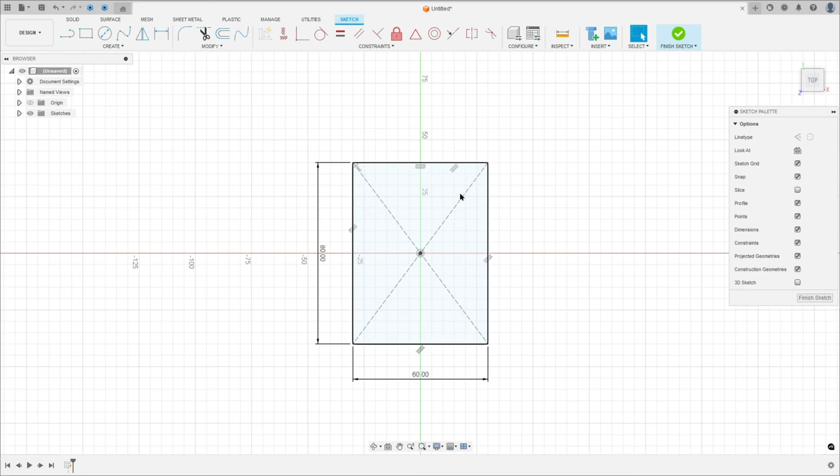So open Fusion, go to create a sketch, select the top plane, select the center rectangle, click here on the midpoint, 80 by 60 millimeters, okay? Finish the sketch, go to extrude, extrude this minus 25 millimeters and the taper angle 20 degrees. Press OK. We made this. Okay.

Now we'll make this cylinder here. We have 50 millimeters of radius, the hole has 40 millimeters of radius, and we need to extrude this 40 millimeters, okay? And the distance between the center of the circle and this face here is 155 millimeters.

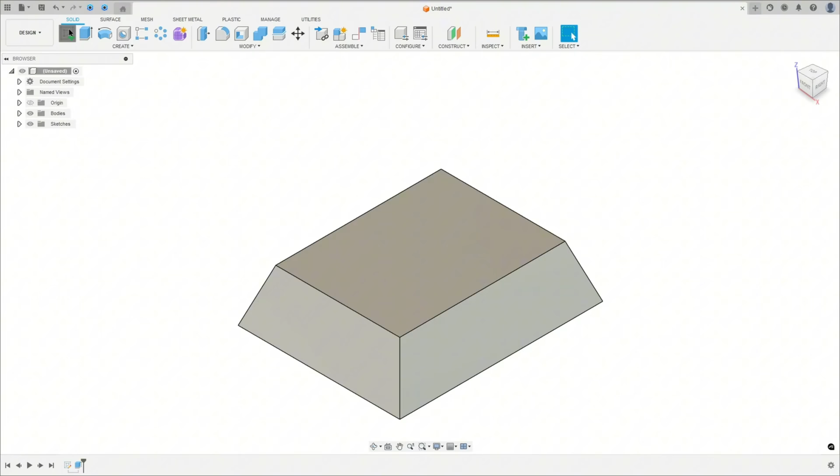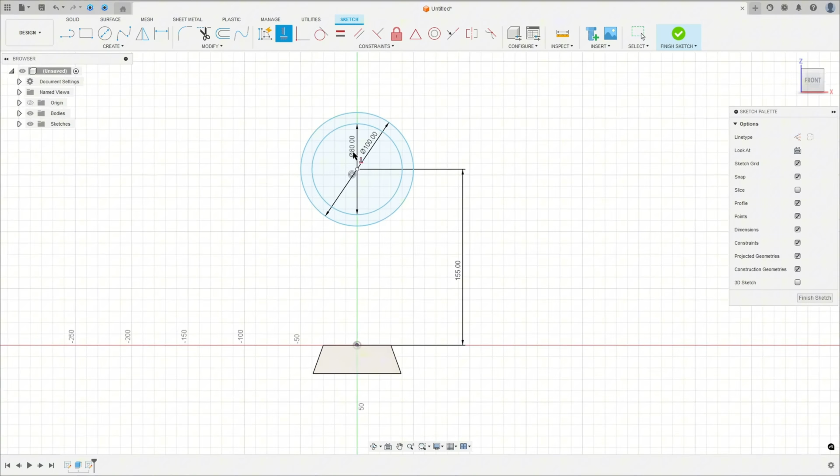So go to create a sketch, select the front plane, select a circle, make a circle here with 100 millimeters and another one with 80 millimeters. Go to sketch dimension, the distance between the circle and the midpoint here, 155 millimeters. And go to constraint, select horizontal/vertical, select this point and this point here.

Now finish the sketch, go to extrude, select this profile. The direction here, select symmetric, measurement whole length, and the distance here, 40 millimeters, okay? We made this.

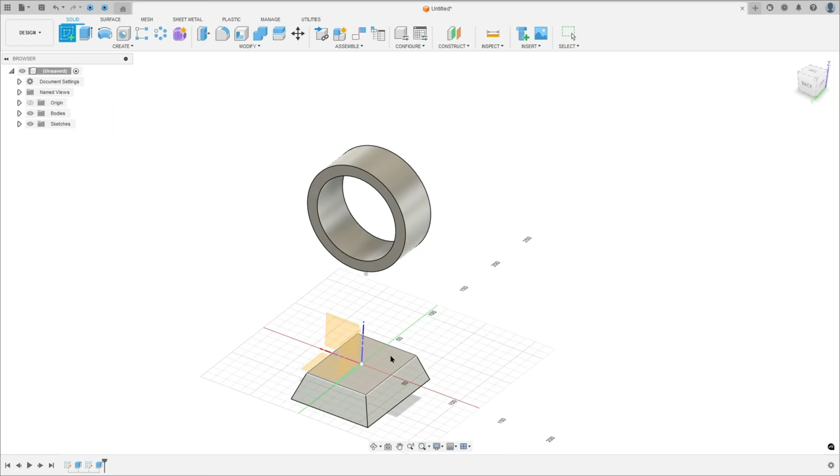Now we make the cylinder here, from this face to this cylinder here. The diameter is 30 millimeters. So go to create a sketch, select this face, select the circle, make a circle here with 30 millimeters at the midpoint, finish the sketch, go to extrude, select this profile, the extent here to object, select this object here, operation join and press OK. Made this, okay.

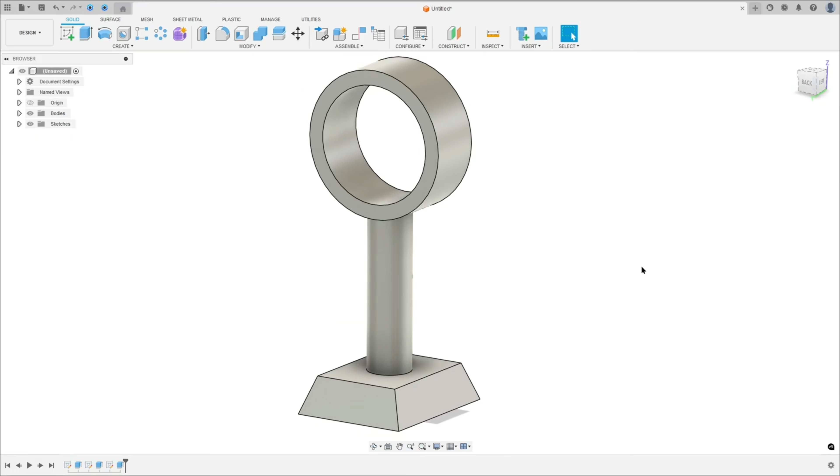Now we'll make this cut here. This cut has a radius here of 12.5 millimeters and we have a line here. It is like a rectangle with a circle in the center, okay? 18 millimeters here and 12.5 millimeters of radius.

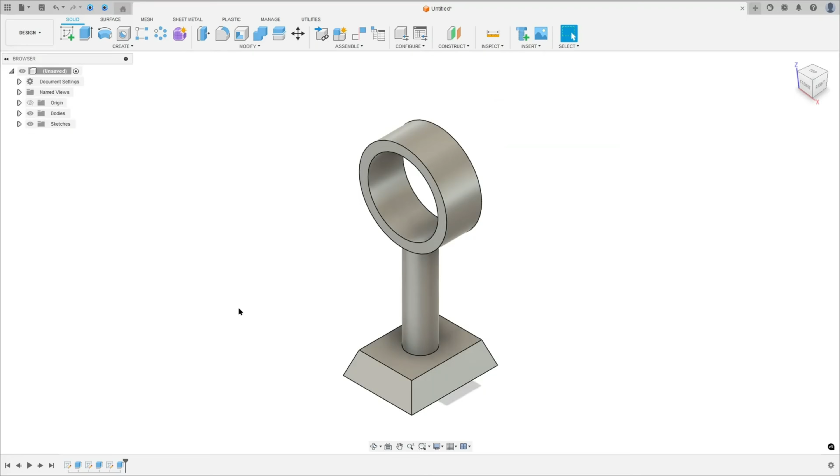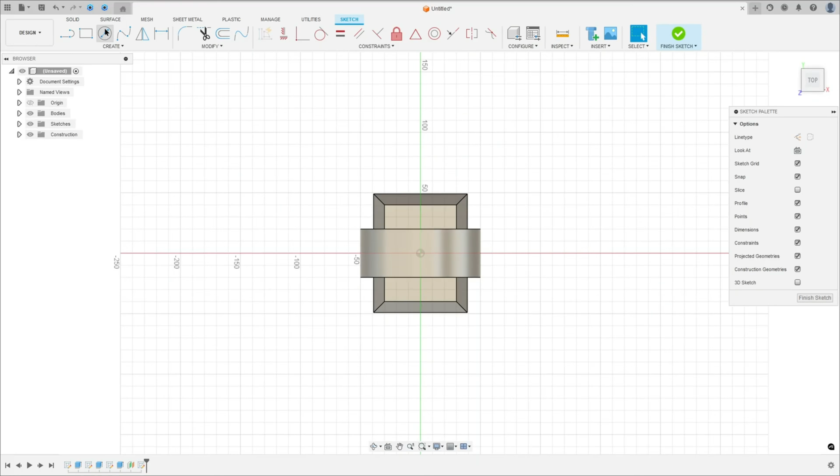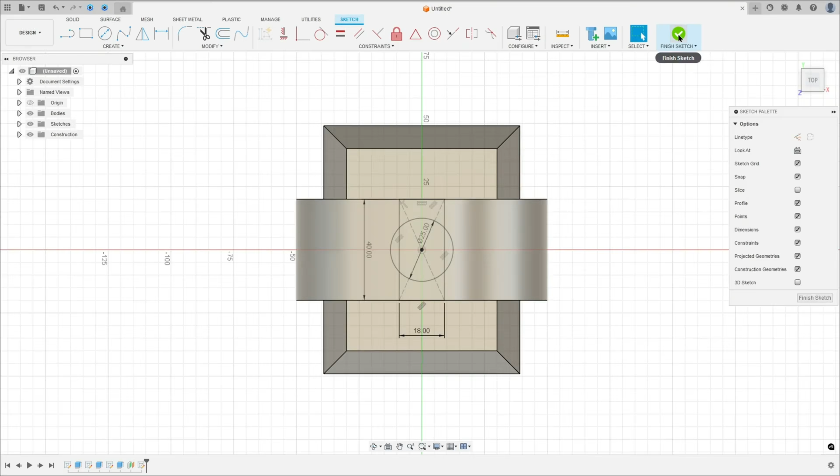So first, go to construct, select offset plane, select this face here. The offset here is 155, and go to create a sketch, select this plane here. Select a circle, click here on the midpoint, make a circle with 25 millimeters. And go to center rectangle, click here on the midpoint. The distance here, 40 millimeters by 18 millimeters, okay? And finish the sketch. We have this profile here.

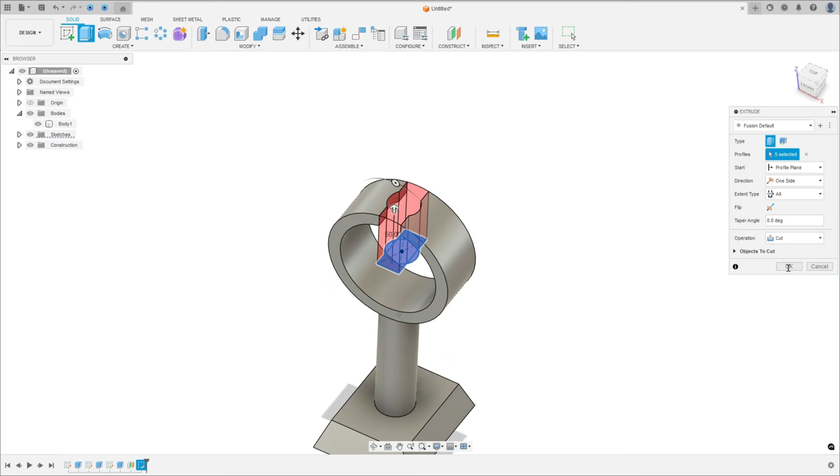Now go to extrude, select this profile, all this face here. And the direction, one side, the extent type, all, operation cut, and press OK. We made this cut here.

Now we need to create a cut here. The diameter here is 30 millimeters. And the distance from this point here to this edge is 42 millimeters, okay?

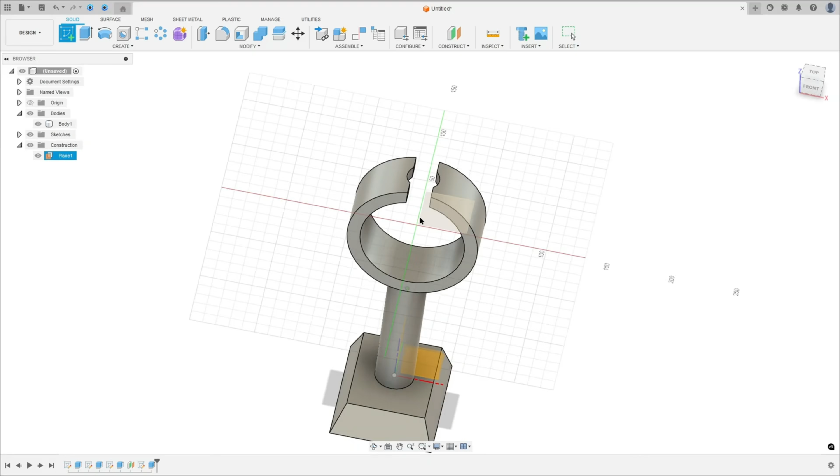So show plane one here, go to create a sketch, select this plane, select the circle, click here on the midpoint, make a circle with 30 millimeters of diameter. Finish the sketch, and go to Extrude, make a cut here, minus 42 millimeters, operation cut, and press OK.

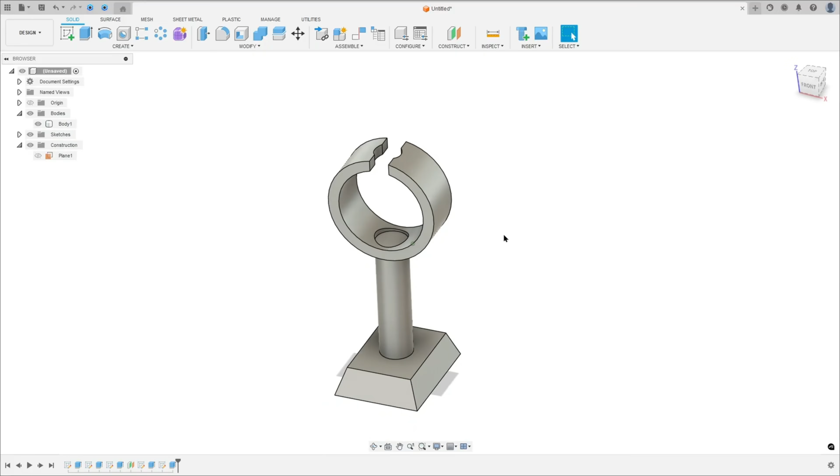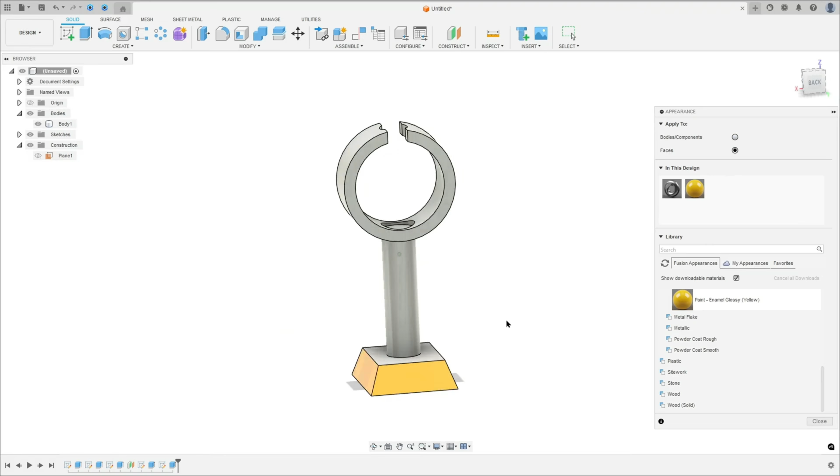We made this. Now press the letter A on the keyboard to add some color here. Go to Paint, Enamel Glossy. I select some faces here, okay? So here we finish our exercise.